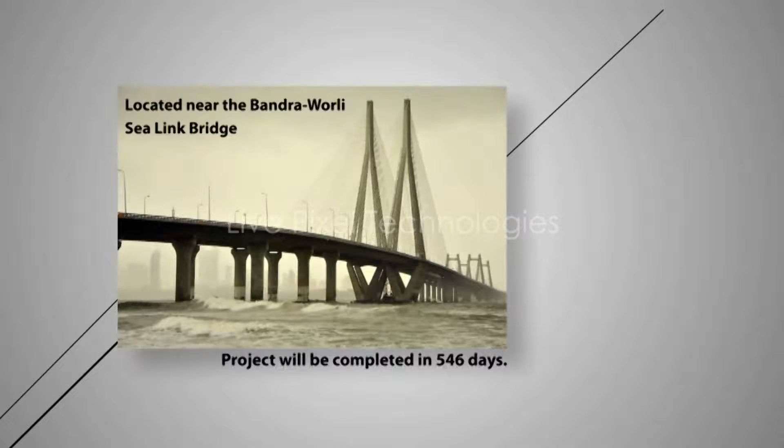The passenger water transport terminal will be located near the Bandra-Worli Sea Link Bridge, and the project would be completed in 546 days. The broad scope of work would include piling operations to lay foundation for the jetty and the terminal building of Bandra Port, carrying out dredging works around the proposed site, strengthening and extension of the existing breakwater,

construction of a state-of-the-art terminal building and parking spaces outside the building, creating approach roads around the proposed site to allow swift access to the new port, construction of link span and floating pontoons for up to 6 catamaran boats and a hovercraft port. Many of these activities would be carried out simultaneously by the joint venture so that the project is completed well in time and handed over to the MSRDC.

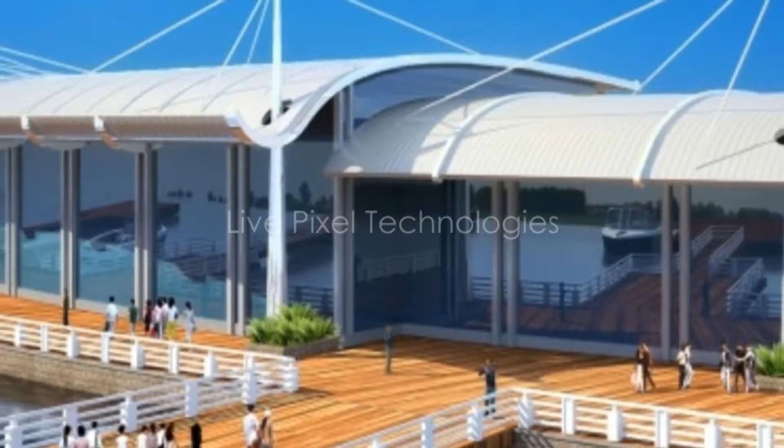Once complete, the Bandra port is estimated to serve 2 lakh commuters, handling 500 ferries daily, thereby forming a key solution in resolving the traffic woes of Amchi Mumbai. Let us now understand how Supreme DBM would turn this exciting new port into a reality.

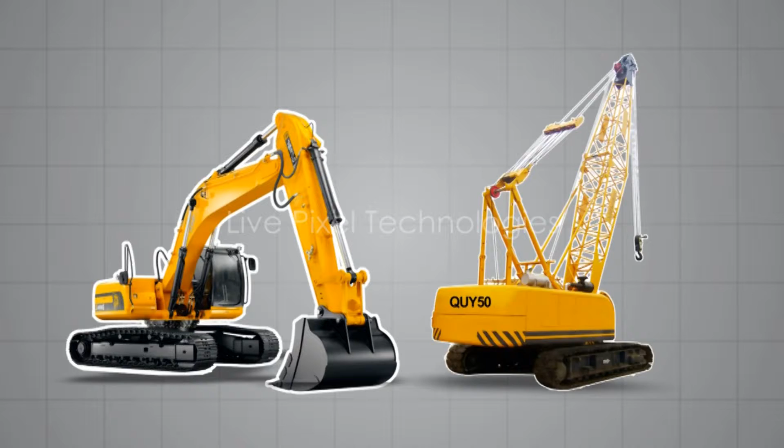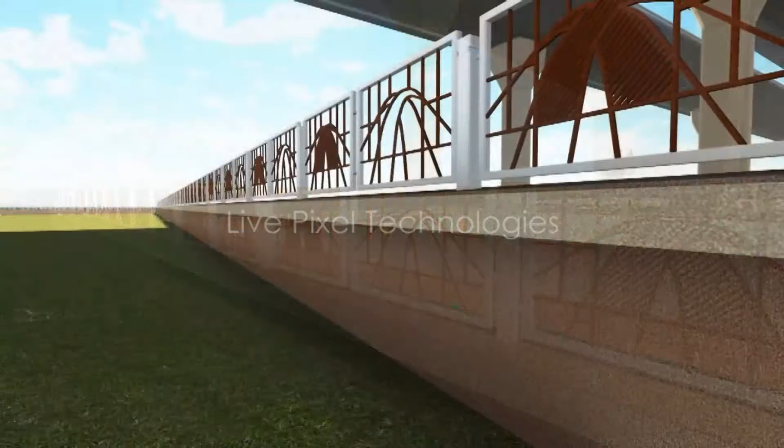Survey and mobilization. As a first step, the Supreme DBM joint venture would do extensive survey of the proposed site, researching and collecting data, performing geotechnical investigation of soil, and make amendments in the design based on analysis of the data collected. These extensive surveys would allow us to mobilize the right kind of materials, equipment, and personnel to carry out the construction activities. Simultaneously, a project wall would be constructed around the periphery of the project to secure the proposed site.

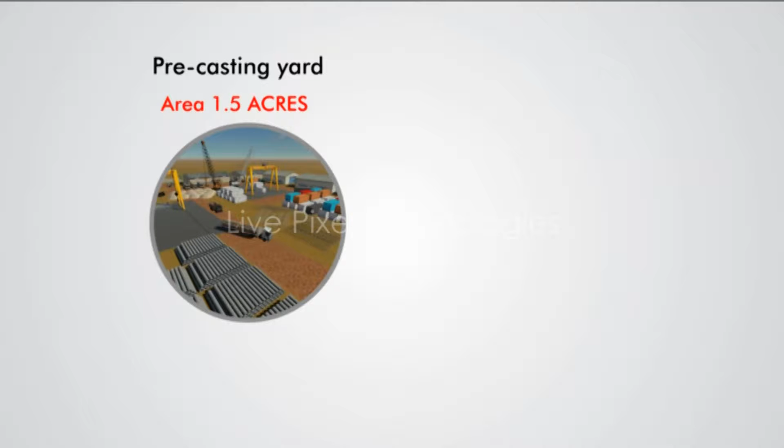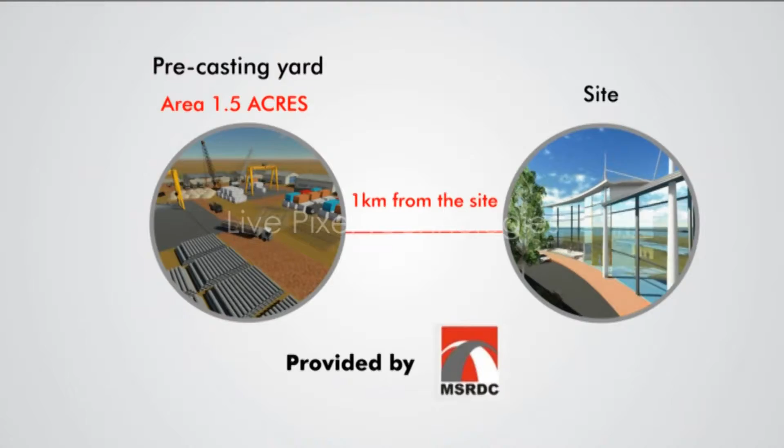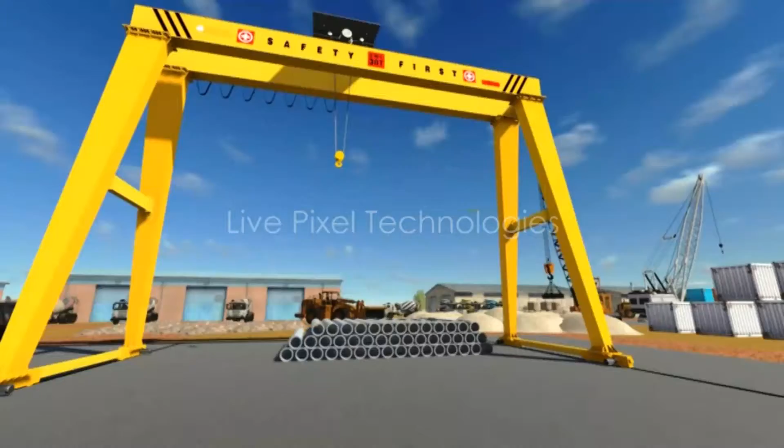Precasting yard. For the storage of construction material and carrying out precasting jobs, an area of around 1.5 acres, which is within 1 kilometer of the site, will need to be provided by MSRDC. This space will be used as storage and laydown area for casting of the blocks, stocking of supplies, stacking of pipes, and setting up a construction site office.

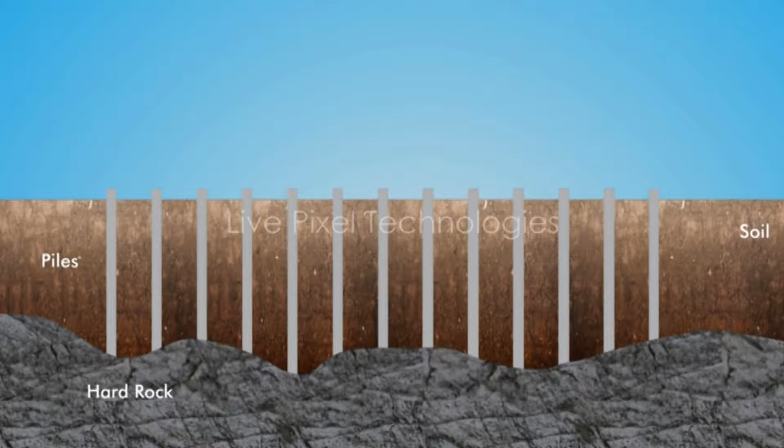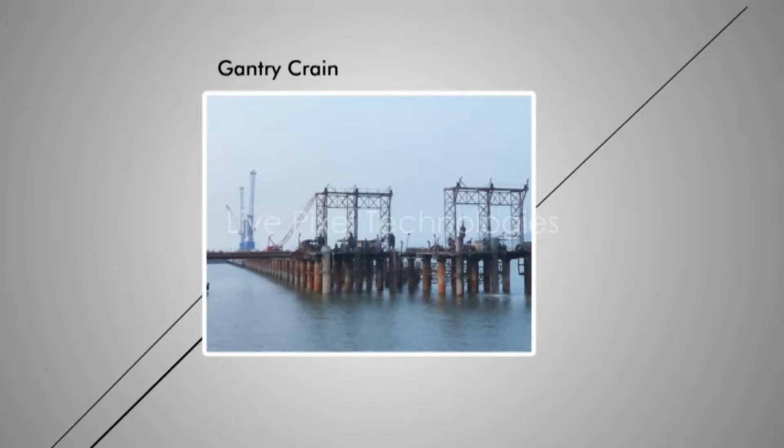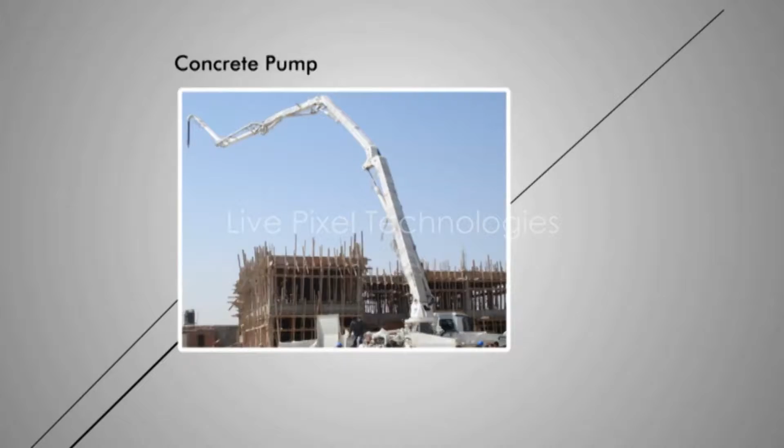Piling. Piling is the process of driving steel or concrete piles into the ground to transfer the load of a building or structure to deeper soil or rock of high bearing capacity, thereby providing support to a structure. Piling would form a crucial step in the construction of the Bandra port, and the process would commence from the 4th month onwards. Various equipment such as gantries with 4 winches, crane barges, vibro hammers, diesel winches, tugboats, concrete pumps, among others, would be deployed for laying the pile foundation.

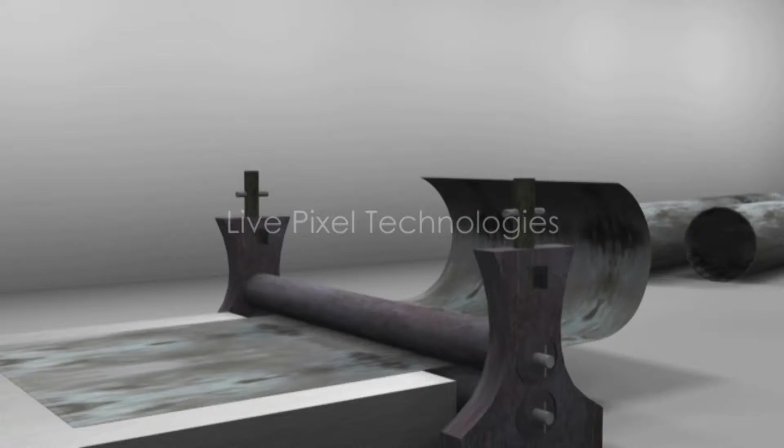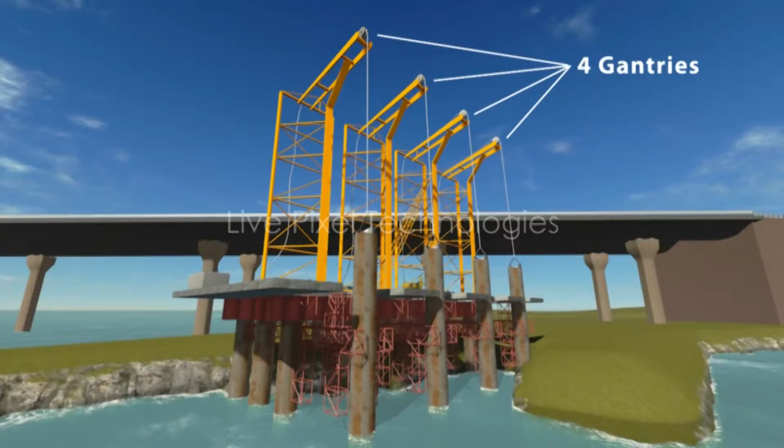Piles would be fabricated on site and transported to the gantry using cranes. Temporary piles will be driven at the appropriate location using vibro hammer to support erection of piling gantries. 4 such piling gantries with 4 winches each will be erected to allow piling to be carried out at multiple locations. Once a set of piles are driven, the gantry would move forward to place the next set of piles into the ground.

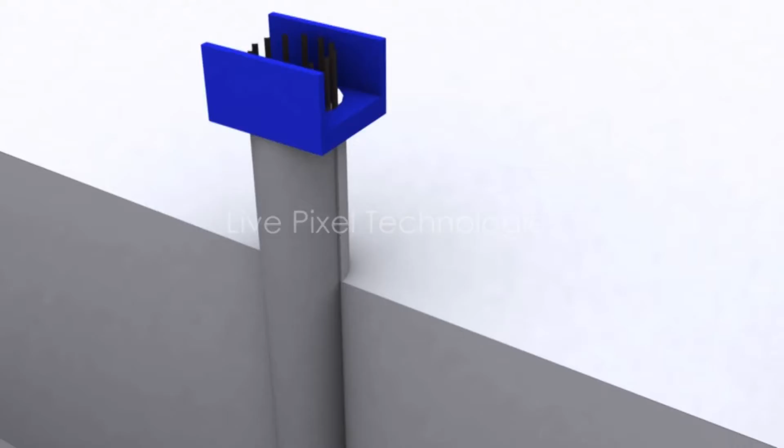The piles would then be chipped and fixed with pile caps. Pile caps would be connected together using beams forming a mesh of concrete and steel. Concrete pumps would carry out in situ concreting, and then the deck slab would be laid on the pile foundation. The piling gantries would move from west to east and thus lay the foundation for constructing the jetty and the terminal building. The entire piling work is slated for completion in 314 days, and the process would overlap with other activities such as dredging and breakwater construction.

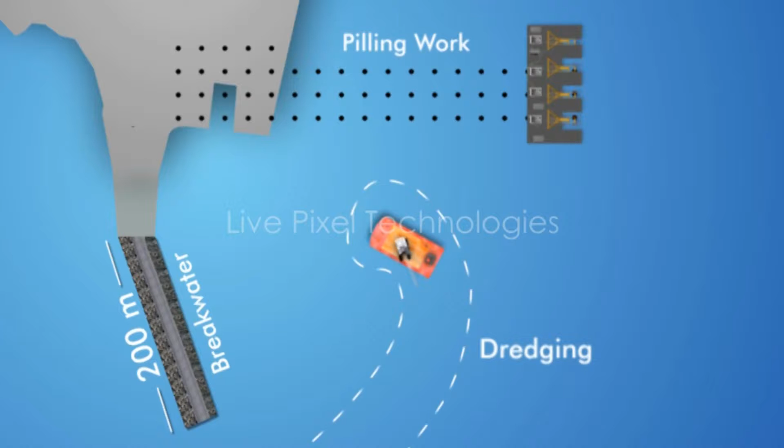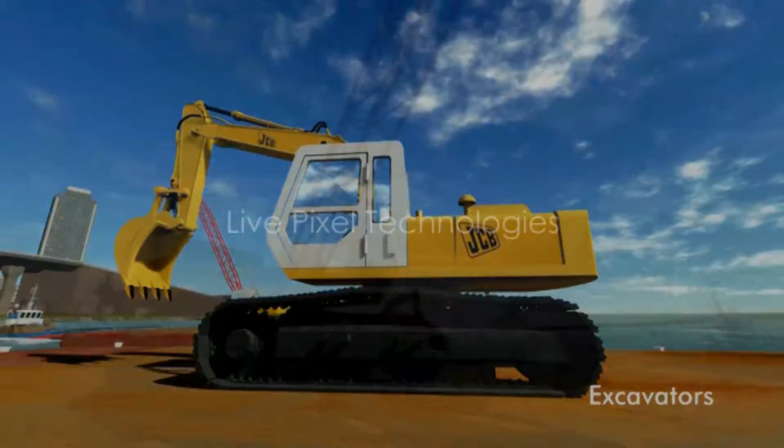Dredging. The site of the Bandra port is surrounded by shallow waters which can hinder the movement of larger boats during low tides. Hence, the seabed around the port would need to be excavated to deepen the harbour by up to 12 feet. This underwater excavation is called dredging. We would carry out the dredging operations using excavators and grab dredgers, which have clamshell buckets attached to a crane mounted on spud barges.

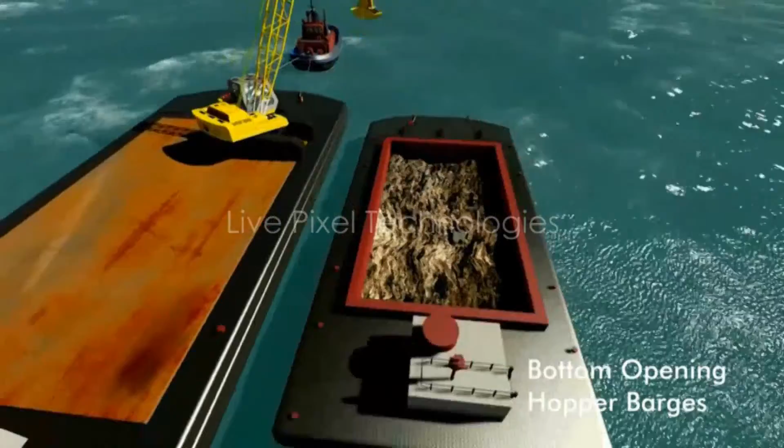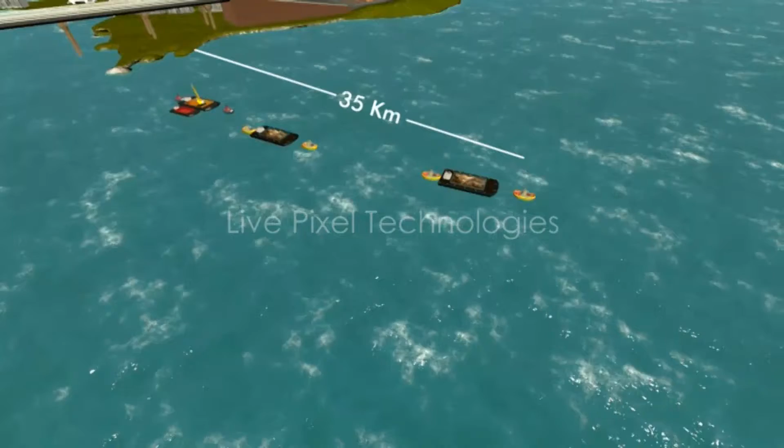These dredgers would excavate the bay mud and load it on bottom opening hopper barges, BOHB. Once filled, these hopper barges would be towed away to the disposal location by tugboats. This disposal location would be at least 35 kilometers from the proposed terminal. On reaching the disposal location, the bottom of the hopper barges would be opened to dispose of dredging material.

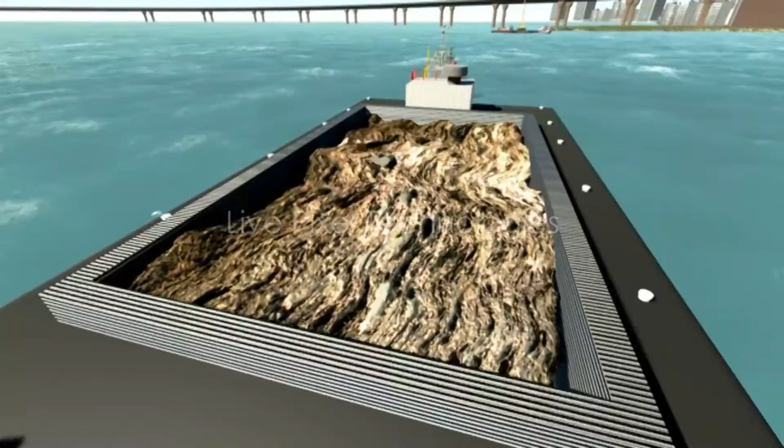Multiple hopper barges would be deployed to carry out round-the-clock disposal of dredged materials, and the entire dredging operation would be completed in 300 days.

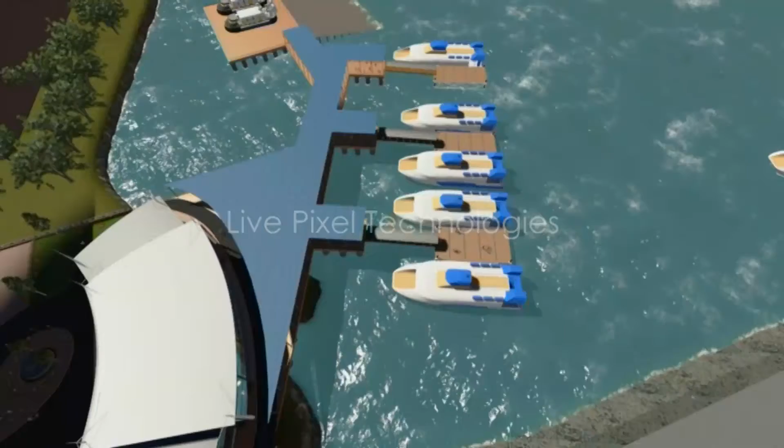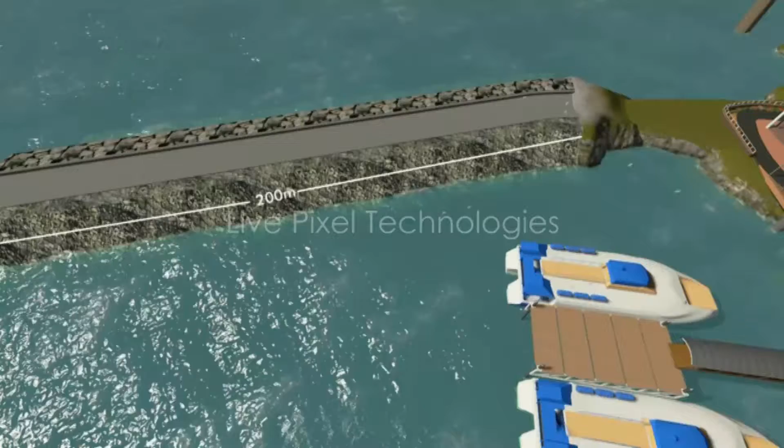Breakwater. The Arabian Sea can get quite rough at times, causing damage to unsecured property on the seafront. Hence, in order to protect the new Bandra port and the anchored catamarans from the pounding of the waves, an underwater seawall or breakwater would be constructed, which would absorb most of the waves' force. The proposed breakwater would be 200 meters long and created by extending the existing breakwater built for Bandra-Worli Sea Link.

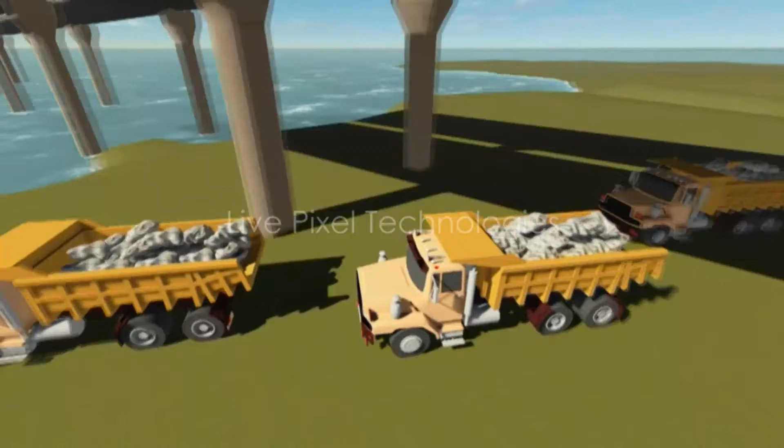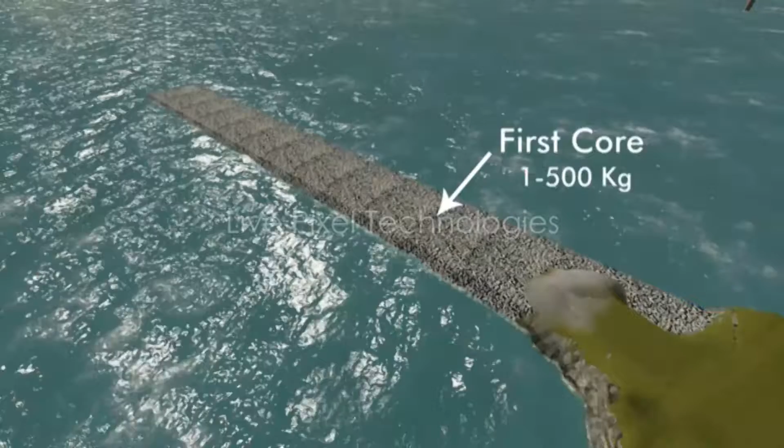Based on the hydrographic survey of the seabed and the waves carried out in the beginning, rocks of various weights and size would be acquired from nearby quarries and shipped to the site either by land or by sea for constructing the breakwater. First, the core of the breakwater would be laid by dumping smaller stones, 1 to 500 kilos, using bottom opening hopper barges, BOHB, forming a heap structure.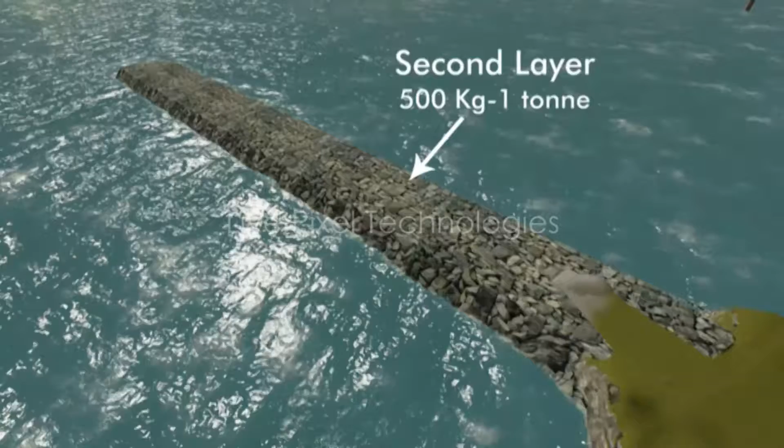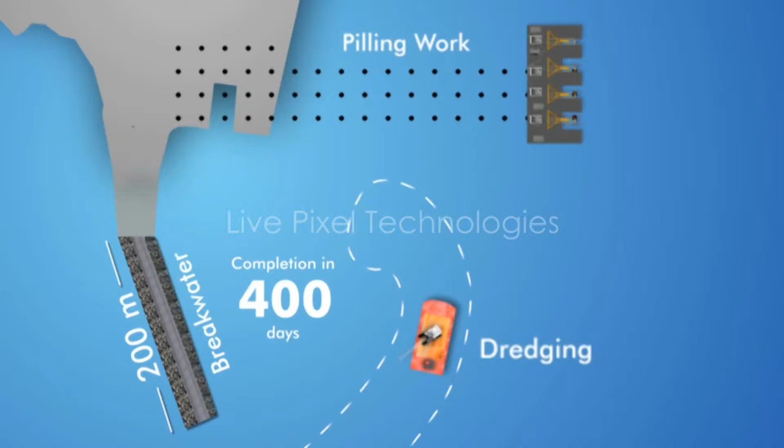The core would be surrounded by an underlayer consisting of larger stones, 500 kgs to 1 ton, to protect the core. The underlayer would be further protected by the main armor, which would be made up of even bigger stones, 1 to 3 ton. The armor layer would act as the primary speed breaker for the oncoming waves and absorb most of their energy. Under the guidance of divers, each stone would be placed through cranes one by one in a sequence to ensure interlocking. The 200-meter breakwater would be completed in 400 days and thus protect the Bandra port from the gruesome force of Mother Nature and provide tranquil waters around the jetty area.

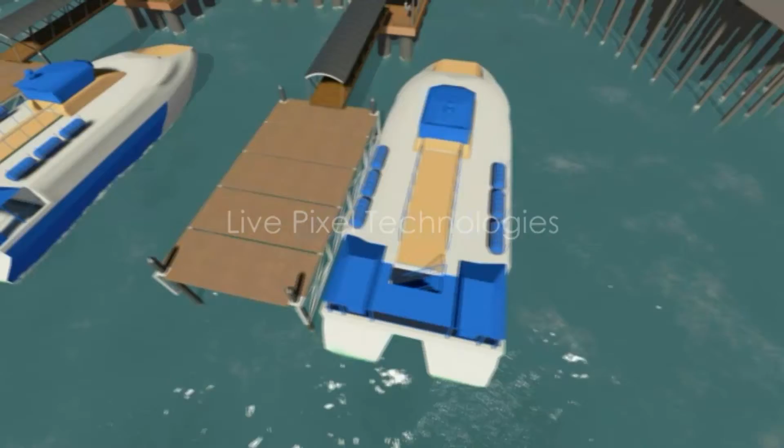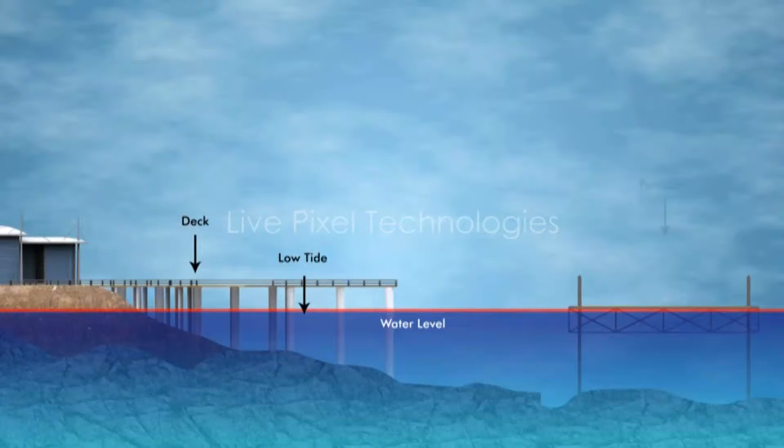Pontoon and link span. After the construction of the deck is complete, ramps that serve as docking points for the ferries would be provided. For this purpose, 6 pontoons would be placed next to the deck. These floating pontoons would allow passengers to get on and off the ferries. Each pontoon would be connected to the deck by link spans or drawbridges, which would tilt up or down depending on the level of the floating pontoons. The pontoon and link span fabrication and installation would be completed in 300 days.

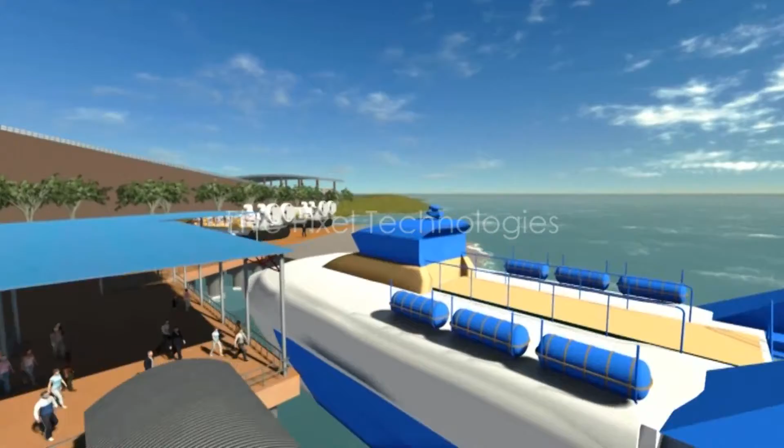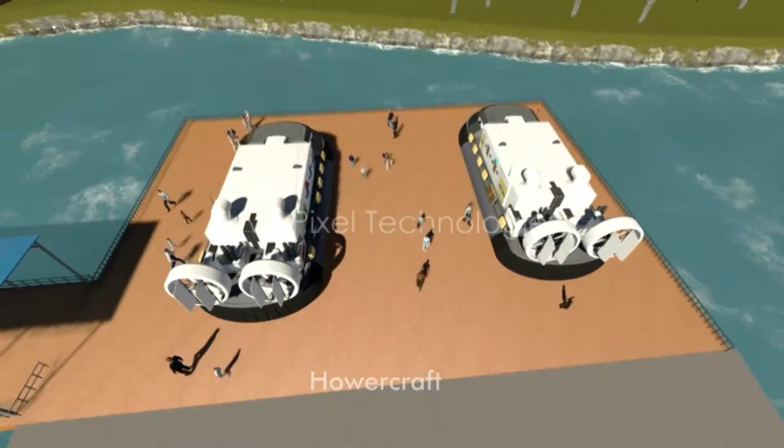Hoverport. Besides docking area for catamarans, the Bandra port would also have a hoverport terminal for landing of 2 hovercrafts at a time. The hoverport deck construction would involve reinforcement binding and concreting, which would be completed in 125 days.

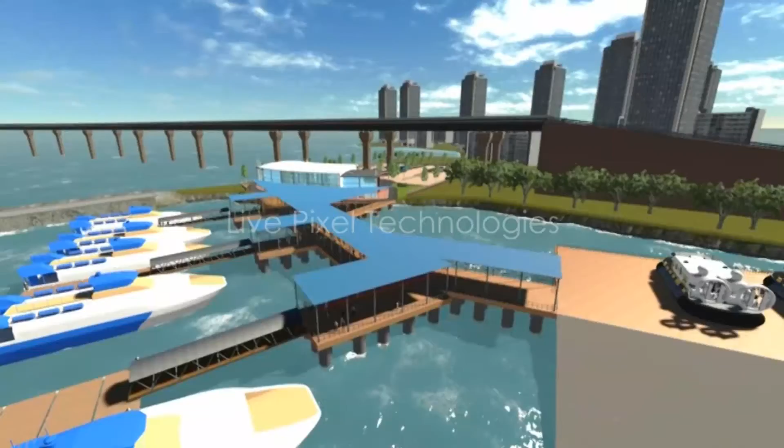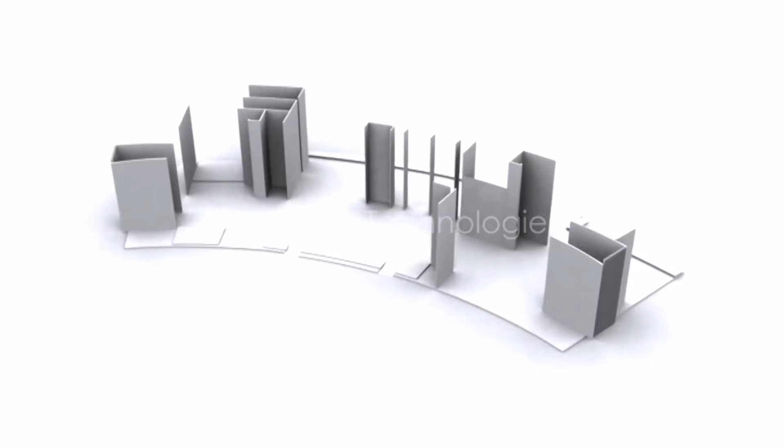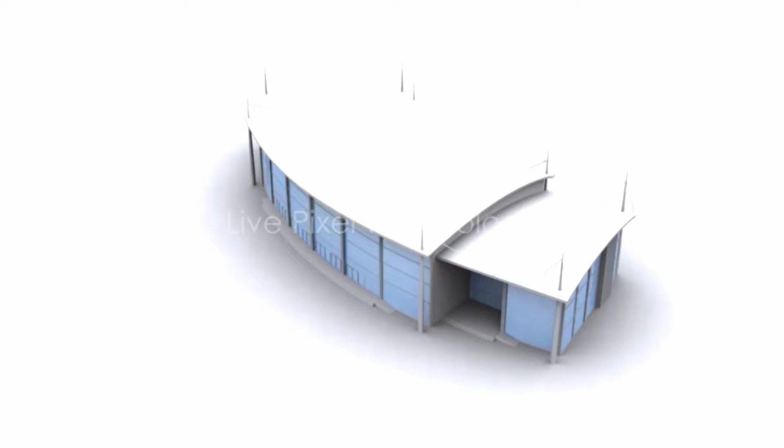Terminal building. The terminal building at the Bandra port would be located on the reclaimed land, and its construction would begin once the land piling work by Gantry 3 gets completed in the first 4 months of the project. The terminal building would be a 2-storied steel frame structure with reinforced concrete panels. After the RC foundation work is laid, the building structure would come up using reinforced steel and concrete, and external walls will be constructed with the associated beams and slabs. Equipment such as tower cranes and mobile cranes would be deployed for the construction of the building, and concreting work would be carried out by concrete pumps.

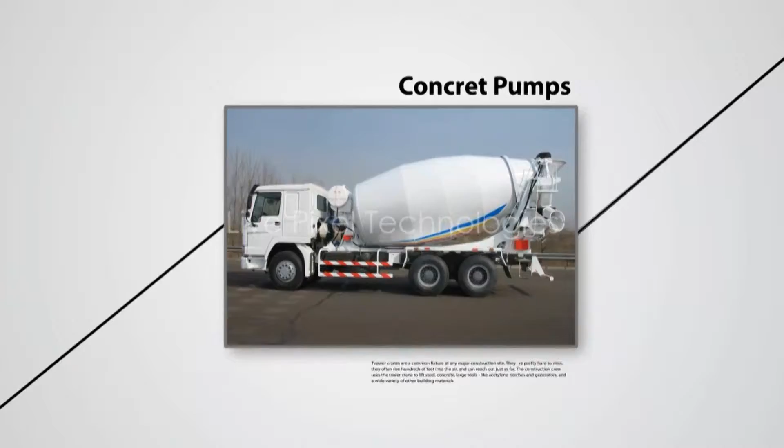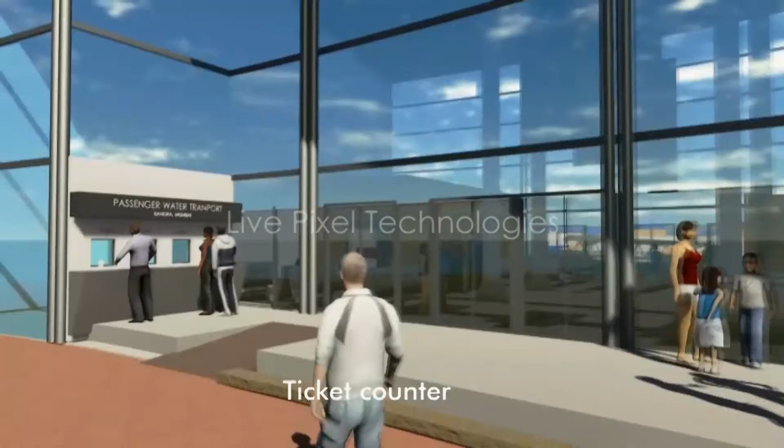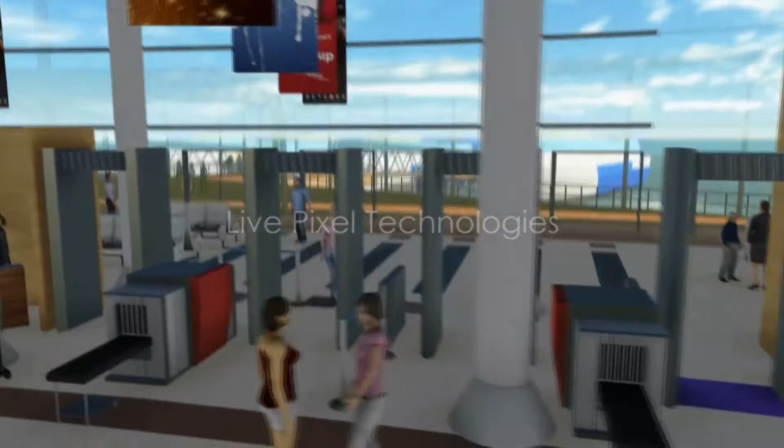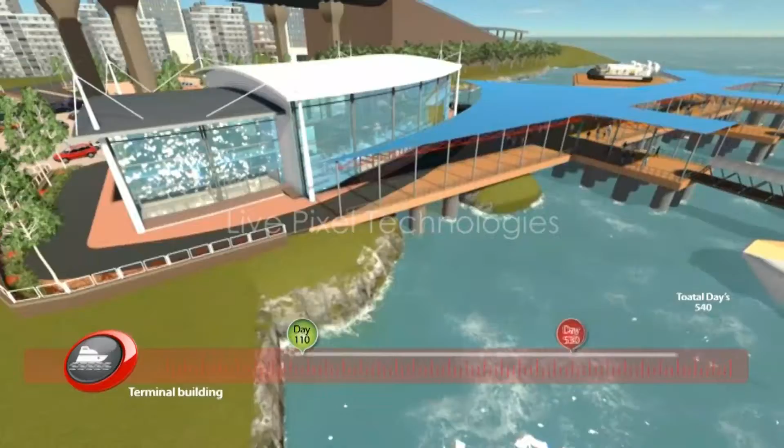Anti-termite treatment would be carried out in the entire terminal in accordance with the best practices and specifications. To give the terminal an ultra-modern look, structural glazing would be done along the whole perimeter of the building. Inside the building, 4 ticket counters would be provided along with the necessary IT systems. Supreme DBM Combined would also undertake construction of basic amenities within the building, including electrical fittings, concealed plumbing and drainage system, firefighting system, vitrified flooring, heating, ventilation and air conditioning (HVAC) system. The terminal building construction would commence from the 4th month and the building would be ready in 420 days.

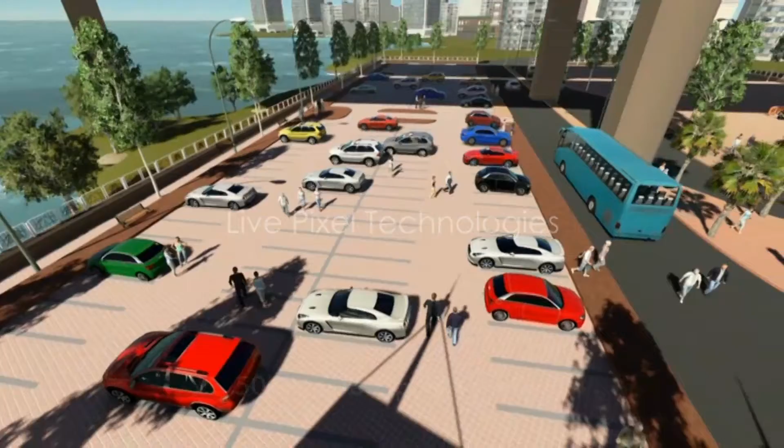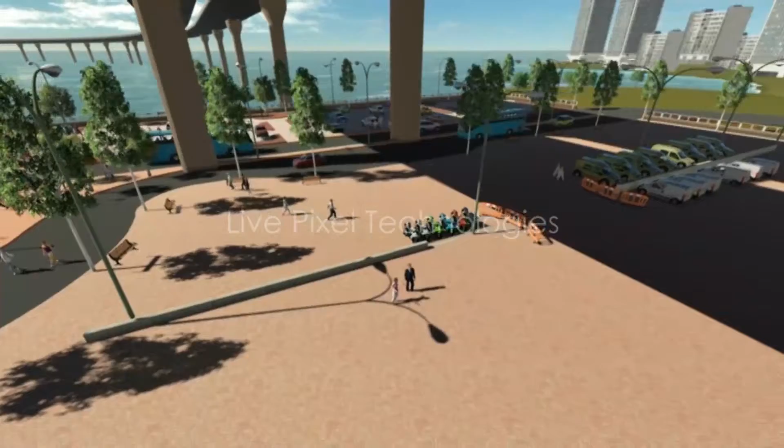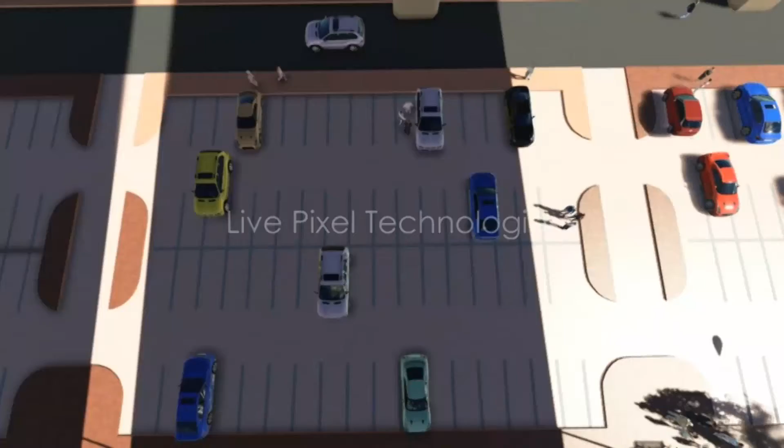Parking and road. Outside the terminal building, a 5,000 square foot parking area would be provided with parking space for up to 100 vehicles. What is the use of a port if it is not easily reachable? Hence, to allow easy access to the Bandra port, we would construct a 16 feet wide concrete road stretching between point A and the terminal building.

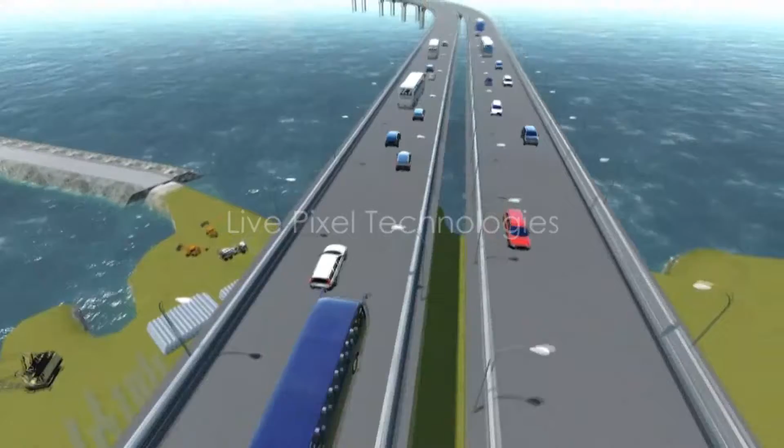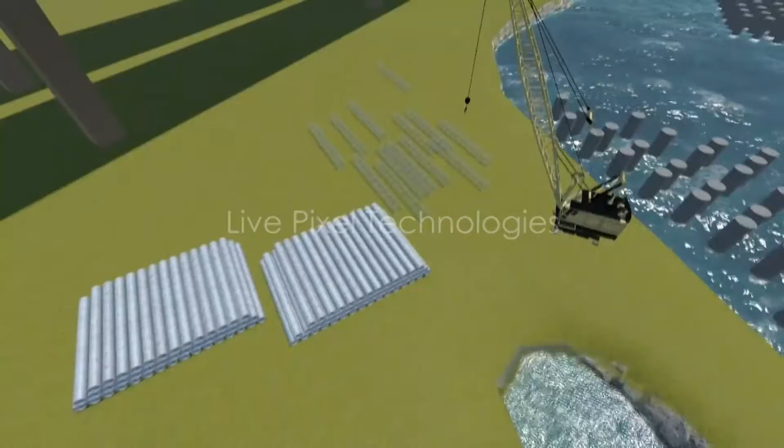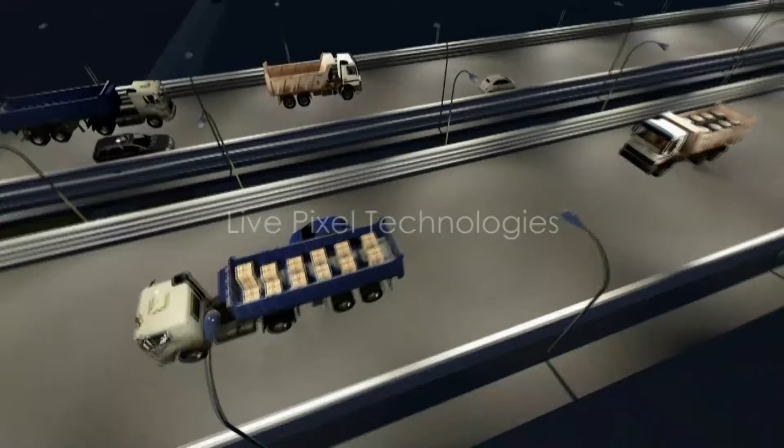Traffic diversion. The location of the project site is below the Bandra-Worli Sea Link, and as such, the construction work would not interfere with the traffic movement in the region. Additionally, we plan to carry out the transportation of materials in a manner that minimizes public inconvenience by efficient scheduling of truck deliveries during non-peak hours or night time whenever possible.

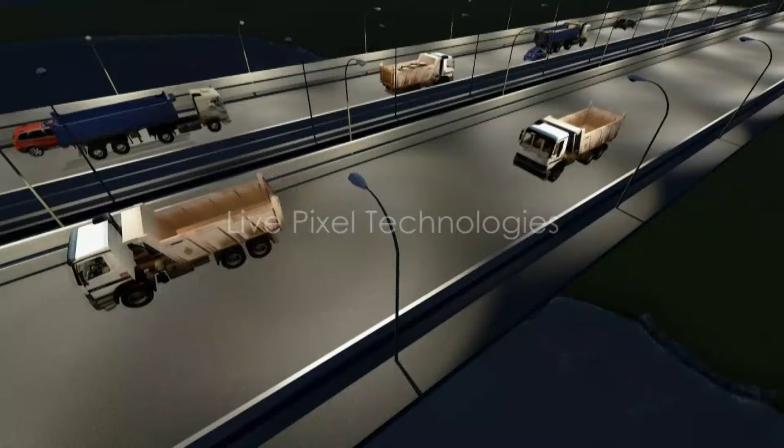Navigation aids. Once the terminal building and the jetty construction is completed, navigation aids such as channel markers, signaling systems and control room would be provided to ensure precise movement of ferries around the Bandra port.

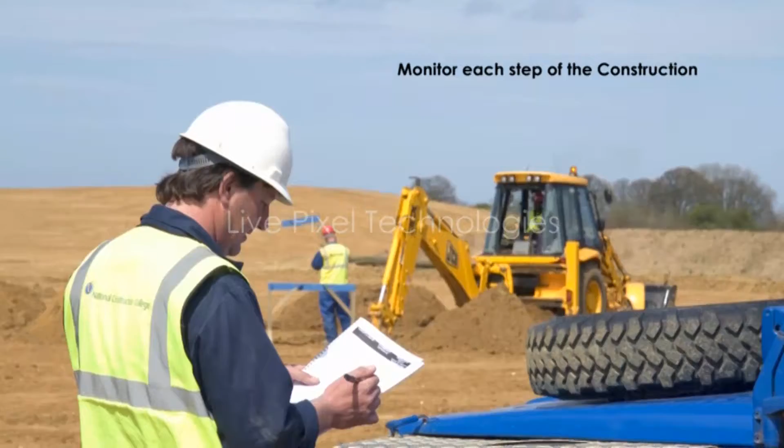Word on safety and quality assurance. We at Supreme DBM have always been committed towards maintaining high standards of quality in our past projects and would put in place rigorous quality assurance checks during the construction of the Bandra port. Highly qualified QA teams would monitor each step of the construction, ensuring quality of the highest standards. Just like quality, following strict safety measures has been our hallmark, and we are proud to say that our past projects have witnessed zero fatalities. We would continue to provide a safe and healthy work environment to our workforce by eliminating or minimizing the hazards that can cause accidents and injuries.